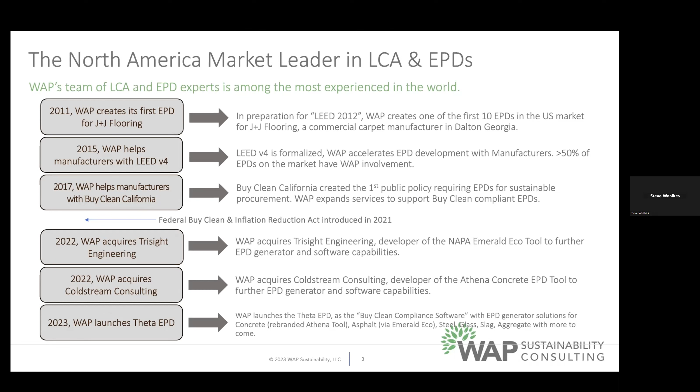We also obviously helped organizations meet what was called the Buy Clean California Act back in 2017, as the state of California started to say, hey, we're going to buy products for our projects that we pay for out of taxpayer money based on global warming potentials, or GWP, and we'll get to that in a little bit. We then last year acquired two different organizations, Trisight Engineering and Coldstream Consulting, which were doing really cool stuff in the software LCA field, which is the basis of the tool that we'll talk to you about today. And that brings us to earlier this year, launching Theta, the EPD program that we're going to get into. So Hannah, if you want to go to the next slide.

So after the introduction, I'm going to basically talk through this. We're going to say, what is embodied carbon? What is driving all of this? What's an EPD? What's an LCA? And what to look for in an EPD? And then also, obviously, the Theta tool. Hannah's going to talk to you about the Theta tool in our program that we've set up with Mission.

So here are acronyms to know. There's not going to be a test, so you don't need to take notes, but just so my gobbledygook of acronyms comes out correctly. EPDs are environmental product declarations. ISO is the International Organization for Standardization. LCA is life cycle assessment. Sometimes you'll also hear it called life cycle analysis. They're the same thing.

PCR are product category rules, and POs are program operators. So now that we're all up to date on those, EPDs are coming. I certainly understand that there are concerns with EPDs in the world. Obviously, the way they're currently utilized isn't the best methodology for the way they could be used. The information isn't always complete in a lot of EPDs that are in the marketplace today.

But this is how organizations such as federal government, state level governments, procurement officers at major universities and major organizations, and architects, designers, and specifiers are using these tools to make decisions. So they are coming, but we don't need to be frightened of them because there's an easy path.

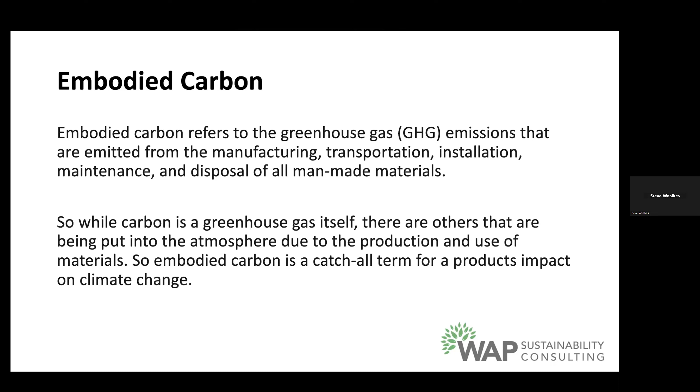So when you hear someone say the embodied carbon, what they really mean is the overall impact that a product has on the environment. It is referring to a specific greenhouse gas, carbon, certainly, but embodied carbon is a catch-all term for all the impacts that a product can have on the climate. Hannah, if you hit the next slide.

Now, when we're talking embodied impacts, for decades the operational phase of energy has been really, really focused on. Energy Star is a big deal. I'm sure most of us have Energy Star products within our home, our fridges, our freezers, our washers, our dryers, light bulbs even have Energy Star ratings now. And we've done a really good job.

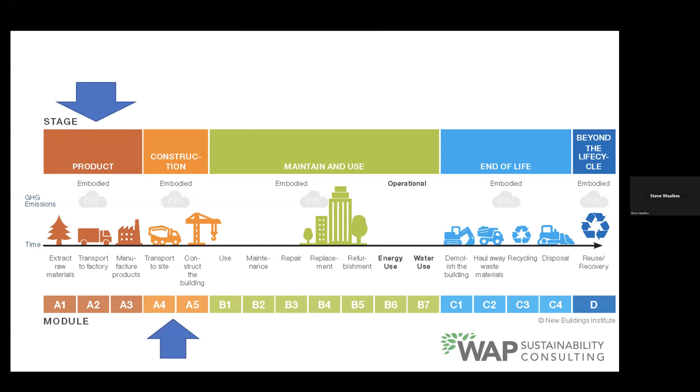The problem is when you truly look at the life cycle of things, Hannah, if you click it another couple times, you'll see that the embodied impacts are everywhere. Keep clicking until we get to they're absolutely all over the place. Embodied impacts are actually more numerous in the product's life cycle than operational.

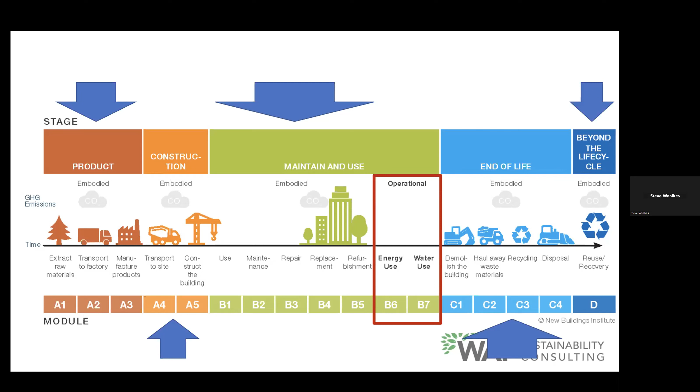Now, they normally end up becoming equal with something like light bulb usage. And in buildings, it's actually pretty equal: about 51 percent operational energy use versus 49 percent embodied energy used to literally build the building or do retrofits. But embodied is everywhere, and we've only focused on this red box for a long time. That's why these blue arrow areas, the embodied, are starting to get more focus. If we slide to the next slide.

And this is kind of what I'm talking about. When you first build a building or an infrastructure project, you have tons and tons of embodied carbon. It comes right up front at the beginning. Lots of it goes into the actual building.

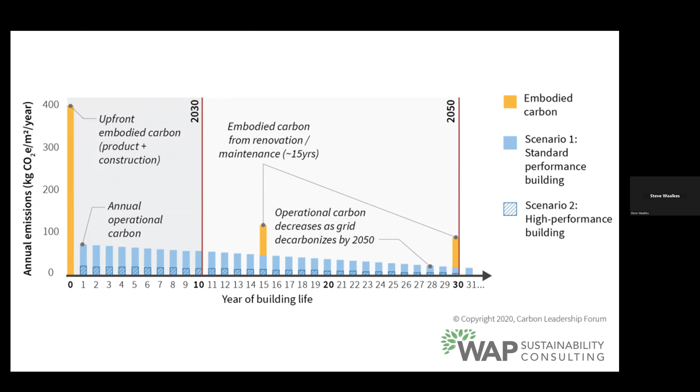Because again, lots of buildings have renovation and maintenance every couple of years. So again, you're seeing those two things equal out when we actually start to do the math. And if we slide over. Thank you. So where and how are EPDs being used today?

So I've got a list of things here. I'm going to go through some of them fairly quickly because they don't directly impact you folks in Michigan, but I wanted you to understand kind of the transition and how we got to where we are today, and the proliferation of these things that are happening in lots of different areas, so that you understand it's coming to your area. Again, EPDs are coming, nothing to be scared of. We can actually move forward with them in a really smart way.

So Hannah, if we go to the first one here, Marin County was really the first law put on the books in code that actually amended the California Building and Residential Code. So this is Marin County. If you've ever heard of wine country north of San Francisco, this is Marin County. And they have set embodied carbon limits for cement products in their jurisdiction. Just go back one more really quickly there, Hannah.

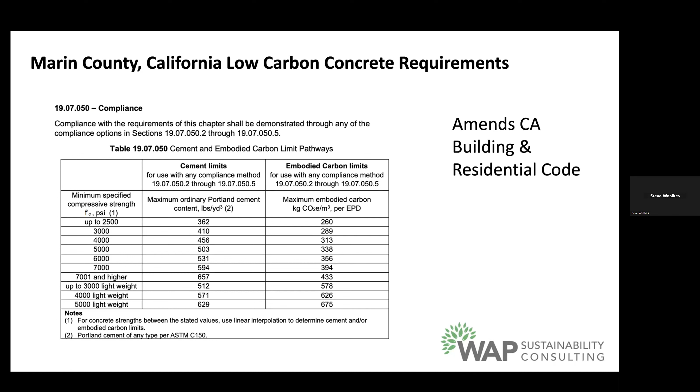See that kg CO2e in the right-hand column there at like 500. Well, that's not going to work for 4,000 lightweight compressive strength cement. We need it to be more, right? So they actually speciated this, and that's led to a good move moving forward. Go to the next one, Hannah.

That leads us to CALGreen. State of California has CALGreen, which is part of their mandatory building code. And they have recently just passed what's in their non-residential or commercial mandatory measures. For any building that's over 100,000 square feet commercial, or 50,000 square feet for a school system, you have 3 paths that you can take.

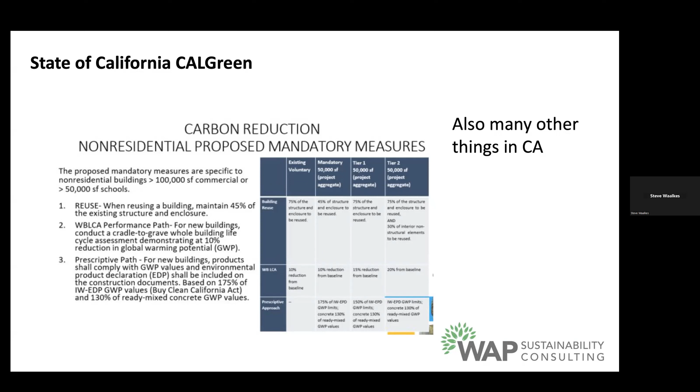One of them is reusing 45% of the existing structure and enclosure. If you're doing a reuse, that's fairly easy. You can do a whole building life cycle assessment, where you have to literally look at all the data in the building for embodied impacts, or a prescriptive path, which is you're using products that are below certain global warming potential values, and they speciated for concrete within their program as well. So again, it is coming to building codes in that manner. If you can go to the next one, Hannah.

The state of Colorado actually has global warming potential, and when I say GWP, that's another acronym, limits for certain materials used in public projects, right? That literally starts January 1st of this year. Asphalt and asphalt mixtures, cement and concrete mixtures are the first 2. So they're doing this for all state of Colorado projects, where they've set global warming potential maximums. Go to the next one.

And the state of Washington Buy Clean, Buy Fair pilot started looking in 2021 at global warming potential maximums in the state of Washington for their projects. And their ultimate goal was, again, to potentially set those GWP maximums. It actually hasn't come forward yet. It's still working its way through legislature, but it is there. You go to the next one.

State of Oregon Department of Transportation: concrete, asphalt, and steel in state infrastructure projects must have a plan to reduce their greenhouse gas by December 31st, 2025, which shockingly enough is about 26 months away. I don't know about you, but the time is moving way too fast. If you go to the next one, Hannah.

Yeah, it's a City of New York executive order. They are now requiring environmental product declarations for low carbon concrete specifications. They're also doing it for steel in the city. Next one, Hannah. City of Portland, Oregon has new requirements for concrete. Again, it started implementation this year. If you go to the next one, Hannah.

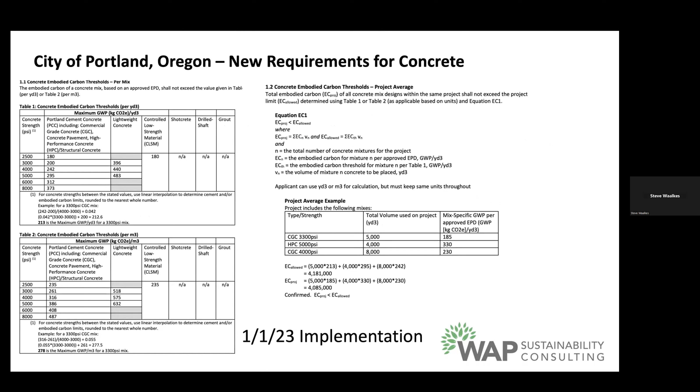Federal Highway Administration has $2 billion in their general appropriation fund given to them in 2022 to hand out through September 30th, 2026. So about 3 years from now, they have to give $2 billion to the state level departments of transportation to fund the procurement of low carbon materials, obviously including your product, right? So looking directly at your product and what is in the marketplace. So the state DOT of the state of Michigan will be getting funds to buy low carbon concrete. If you go to the next one here, Hannah, they're working out exactly how to hand that out.

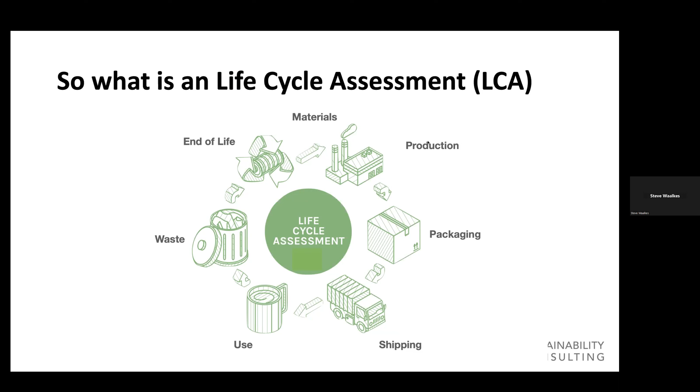Again, today's EPDs required in things like LEED, and a lot of these codes and purchasing requirements, require to have at least A1 to A3. It does not say you can't have the other stages in there, but these first stages, the raw supply, the transport, and the manufacturing of the product, have to be in there. We go to the next one, Hannah.

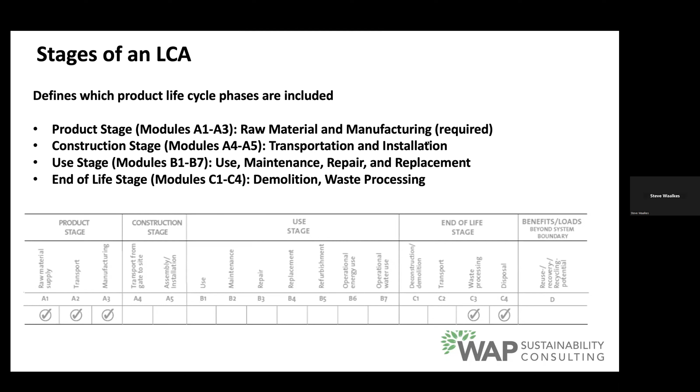So that gets us to the EPD. We have to do a life cycle assessment, and our software makes it very easy, very quick for that to happen. And Hannah will run through that in a second to get to the environmental product declaration. The reason why most don't just simply release their LCA is it's your secret sauce, right? It literally talks about your facilities. It talks about your supply chain. It talks about obviously your mixes and things of that nature in great depth.

Your batch level information, which most organizations in your world don't want to give out. Most organizations in any world don't want to give out their secret sauce of how they're making their product. An environmental product declaration gets the impact data out without giving away the secrets behind it. So when we get to the EPD, it is literally what it is called. It is environmental product declaration. It is a declaration about the impact on the environment that a product can have.

It is not a guarantee of a certain level of performance. Again, some of these purchasing requirements from GSA and from some others have global warming potential maximums. Just because you have an EPD, it doesn't guarantee that you're below that. You'll certainly be able to tell that when running the life cycle assessment and getting the results, whether you're below certain limits. But again, just because a product has an EPD does not guarantee that it is a quote unquote sustainable product. It's just transparent impact data. We go to the next one, Hannah.

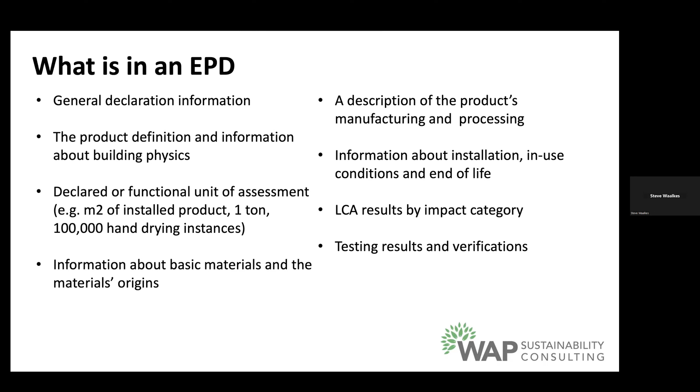So what is in an EPD? We talk about declared functional units, so yards of concrete, for example. We have testing results and verifications that you folks have run your materials through. Basic information about the material's origins. Again, any product definitions and installation and in-use conditions and things of that nature. Fairly standard concepts of what are in an EPD. If you go to the next page, Hannah, the second page, if you click a couple times, yeah, you'll see there. Thanks, Hannah.

The GWP is that embodied carbon that people are asking about. So if someone's saying, I would like to know your embodied carbon number, that's this GWP under the A1 to A3 area, right? And it's expressed in kilograms of CO2 equivalent. Again, hence why we're saying carbon, because it's expressed as an equivalent to carbon dioxide. Again, it does not mean that things like methane and others aren't included in the calculation. They are.

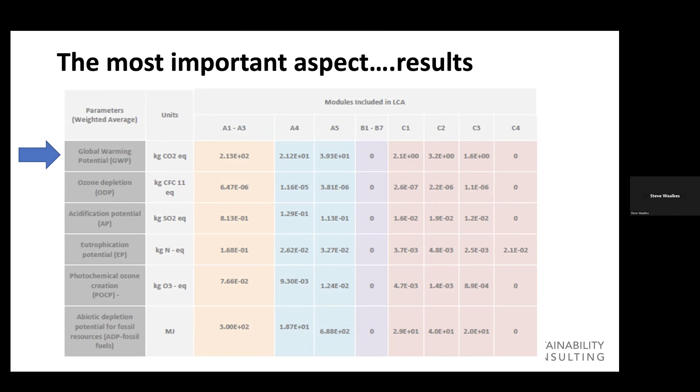So I'm going to hand you over to Hannah. This is all why we're doing this; Hannah's going to talk to you about how we're actually going to do this through the Theta tool. Thanks, Hannah. Thanks, Steve. All right, so as Steve alluded in the beginning of the presentation today, the Theta EPD

software, which is the Buy Clean compliance software that WAP has, he mentioned that there were a couple of mergers that happened late last year: one with Coldstream Consulting that ran the Athena Institute LCA concrete software, as well as Trisight that ran the Emerald Eco-Label tool for asphalt. Both of those, you can access directly through WAP.

We also have a couple other products on board and starting to make their way into the industry, aggregates being one of them. It's launching this fall, I believe, and in the works is steel software as well. So that's basically the entire Theta EPD, where you can go into the different industries, concrete, asphalt, aggregates, and steel.

So with MCA, we came to an agreement with them to help you guys get EPDs. It started out with a state-level association program case study that we did with the Tennessee Concrete Association, which is basically the same thing that we're doing with MCA, where we help their producers get EPDs and get into the market so they can produce EPDs for their projects, for the GSA, for federal projects, everything like that.

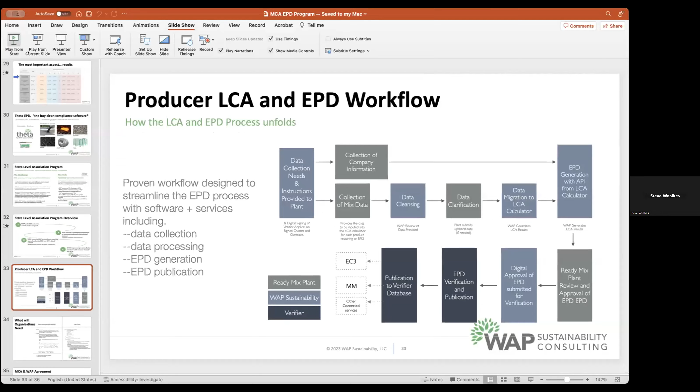All right, so I just showcased the tool. This information here is all of the producer LCA and EPD workflow. So all of that information that I went through that you need to enter into the tool, the data collection. So your suppliers, your production information, and then your supplier distances all need to be entered. It goes through the verification step. And then finally, you're able to publish your EPDs into EC3 and the program operator. They're all verified and you can hand them off to your customers.

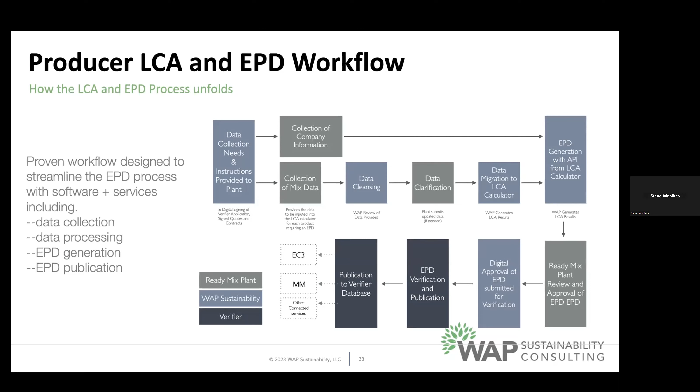Yeah, and Hannah, I can run this one for everyone. Sure. Thank you so much for running that through. Hopefully, folks, the first go through, we'll be there step by step with you to kind of explain it and help you through the system. That's one of the great things about the program. When you sign up at thetaepd.com/signup/MCA, what ends up happening is Hannah runs you through your first couple.

And the great thing is it remembers, right? So your aggregates, if you're using the same aggregates and the same suppliers, the system remembers it. So the second and third and fourth and fifth and 10th and 25th time that you run through your batch for an EPD, it gets easier and easier every single time you go through the system.